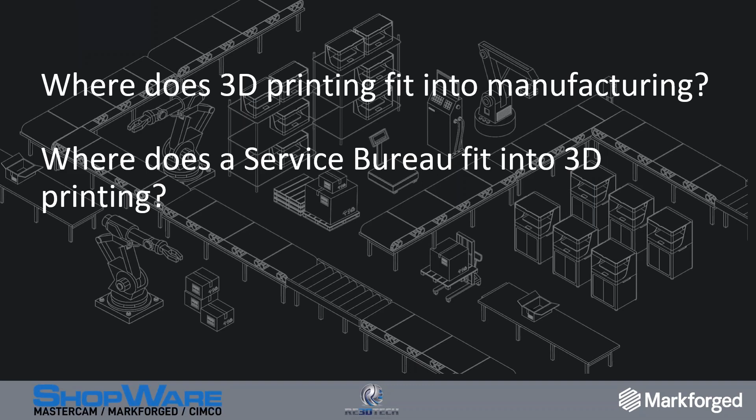Truth be told, there's an inflection point where it makes a lot of sense to use a service bureau for 3D printing needs, and that's the reason we're here today. We're going to take a step back and talk about current manufacturing processes, current state, and what are some typical processes today.

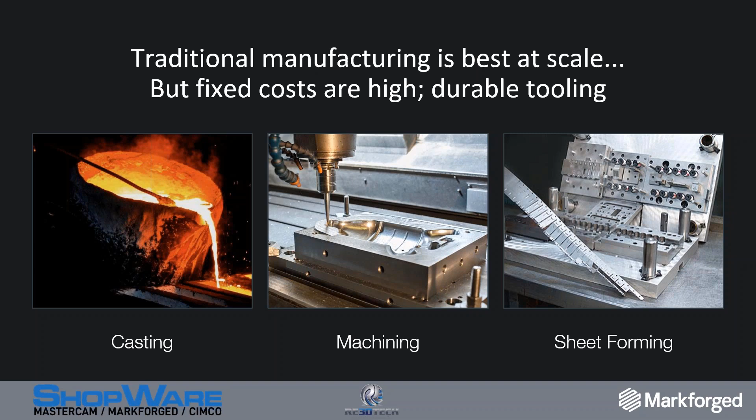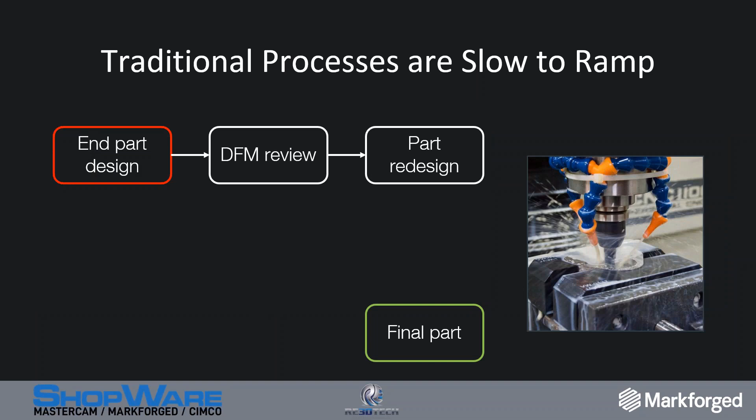The commonality between what we have on our screen right now is essentially that the fixed costs of durable tooling are expensive, and I'm sure we're all aware of that. In the process of designing and ending up at the final part, there's a multitude of steps. Sometimes these steps for making tooling interrupt a CNC, lathe, or machine shop time with non-billable parts. So you're making tooling where otherwise that CNC could be working on a current work order that you'll be shipping and invoicing, and that's what pays the bills.

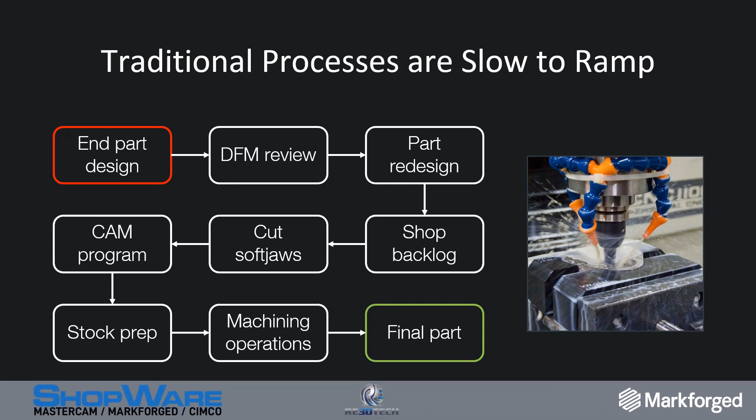Here's a list of 9 steps we're all familiar with in the process of coming up with the final part. That could be a fixture, it could be work holding, it could be soft jaws, it could be parts that go in a cope and a drag for sand casting, and or a CMM fixture in our case.

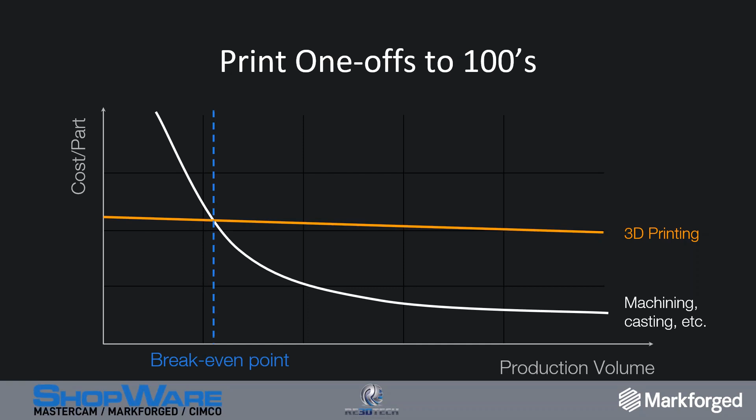The concept, the lay of the land if you will, of making that decision to 3D print or not, and whether or not to use a service bureau or your own 3D printer, is outlined here. For every use case, there's an inflection point of where it makes sense, economies of scale, to utilize this technology, 3D printing, given that in the application these parts will be within tolerance, they'll have the right surface finish, and other attributes like that.

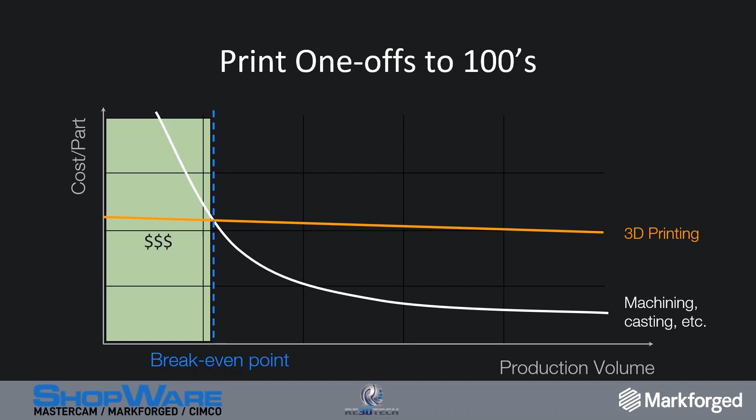When Pete or I start to talk to customers early on in the conversation about 3D printing, we like to understand what problem we're solving and what your current state might look like in the future if additive or 3D printing is adopted. In the background, there's a conversation we'll have concurrently with you about the commercial aspects of it, and I think this chart summarizes where you need to be or not need to be to have it make sense.

The takeaway from this slide and the slide after it is really to set the stage for where this is applicable or where it's not, because 3D printing isn't always the best fit. So there's a little bit of qualification of application involved.

But if you look back in time a few years, or even 5, 10, 15 years, you'll see a lot of design and prototype applications. If we're talking about FDM printing, for example, forcing a plastic matrix through a hot nozzle at a given layer width and layer height, ABS and PLA are common materials for designing prototypes. That's what it's been like.

With Markforged and the software they've developed with their materials and hardware, and because the Onyx material has 20% chopped carbon fiber in it, we're now able to talk about tooling, production, assembly, sometimes end-use parts. It really depends on the use case, the application, the ambient temperature if the part's outside, the heat, and if it's going through too much stress or impact and things like that. So where we're at today compared to a few years ago has widened the potential applications.

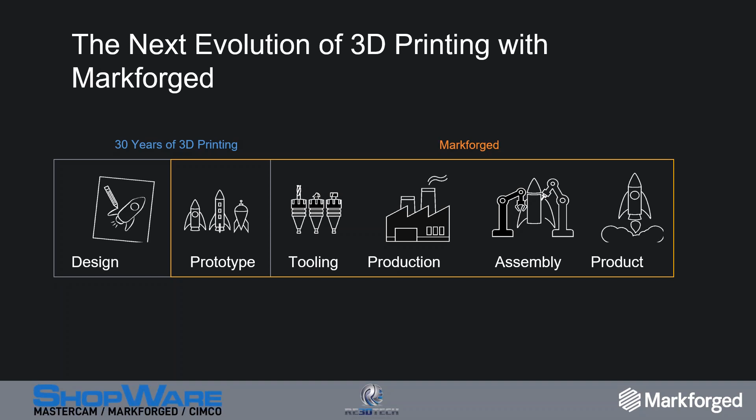Pretty excited to show you some of the stuff we have on our end. We've been fortunate to work with Max for a few years now and have had a really good relationship. One question you might ask is how does a service bureau, and actually a customer of the Markforged technology, fit into doing a webinar with someone that sells the printers? You'd think we'd just want to sell you parts, but the reality is a lot of our customers actually own Markforged technology and are well into their 3D printing journey.

So we embrace letting our customers bring in their own technology. In many cases, we act as their overflow point for volume printing, as well as a good turning point for specific applications we might be able to help them with.

To give you some perspective on what we have in-house, we really specialize in the three different avenues of 3D printing: plastics, and the more unique end, composites and metals. We have all the Markforged products in-house — 3 X7s, 5 Mark IIs, and the Metal X system with all the materials available, as well as the Sinter 2 unit for volume sintering.

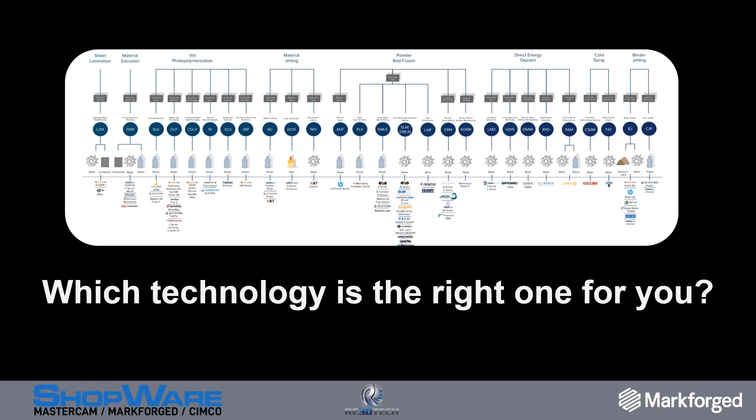And the Markforged technology is no different. What I will say about Markforged, though, is that it's incredibly unique, and there are pretty much three specific reasons why we decided to use Markforged over all the other FFF technologies out there.

Yes, they are a 3D printing company, but really they specialize in industry-leading materials, hardware, and software. I've tested out a lot of different nylon-based materials and filaments, and from my experience, the Onyx material is by far the best. It's a nylon 6 with chopped carbon fiber blended into it, great for high-temp and high-impact environments—a good fit for machine shops and industrial settings, which isn't really the case for most FFF-type printers using things like PLA and ABS.

So right off the bat, the base materials are a big advantage for us and what we try to provide to our customers. The hardware on these systems is top notch, and it allows us to do stuff you cannot do with other FFF-style printers—the biggest aspect being embedding and routing fiber internally in composite parts. There's not another single printer on the market that can do it as well as Markforged and obtain the strength qualities you typically need for an industrial setting.

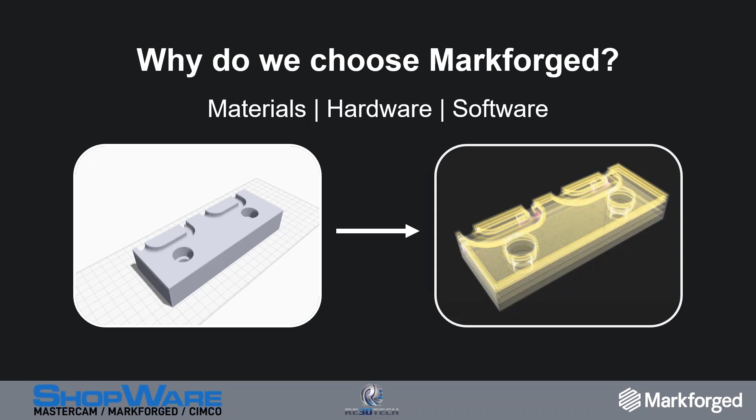So from a customer's perspective, they can reach out to us and have next-day tooling. But really, the best customer we have right now for Markforged technology is ourselves. I use it all the time for larger production opportunities, creating fixtures, custom tooling, and all sorts of projects around the shop that need to get done right away. It's a great fit, and something we're going to continue keeping in-house.

To touch a bit more on the unique aspects of the composite technology from Markforged, this highlights the part we were just looking at. What you'll notice is this is essentially an X-ray or internal view you can get from the Eiger software. Towards the top of the part, there's a higher density of yellow interior lines, representing the ability to embed true fiberglass, high-strength high-temp fiberglass, Kevlar, or carbon fiber into the part. In this case, it's high-strength, high-temp fiberglass.

It's mostly towards the top because that's where my component actually grips onto the piece I'm holding. So I don't need an excessive amount of fiber at the bottom of the part—I mostly put it there just to reinforce the bottom sections. Towards the top is where I'm actually getting equivalent strength to metal using that fiber. You can see that highlighted in the bottom ticker bar, which has groupings of the fiber in there, and that's completely customizable.

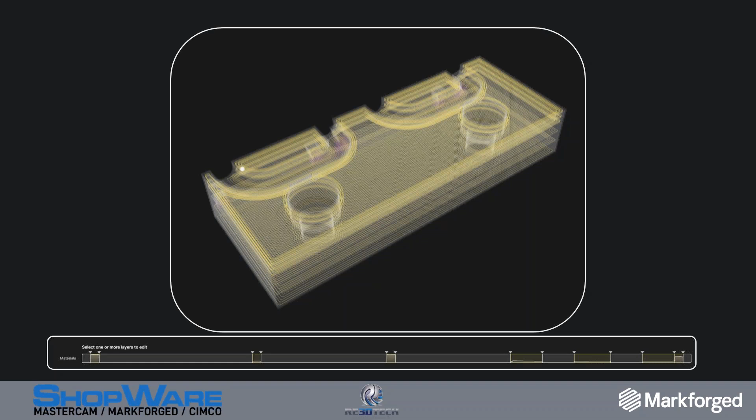I love talking about composites, but at the end of the day, everyone is really interested in metal. So I wanted to give a little application spotlight on a D2 tool steel application that we recently built out, and our customer just went into production with these components.

What you're looking at here are, best way to describe it, dent removers, customized dent removers for hail damage. This tool is used on the inside of a body panel. If you had a dented door, you'd drill a small hole in the side of the door and use this tool to go in there, and the body shops can finagle and bump out that dent from the inside. Not an application I ever knew about or had any idea existed.

This customer reached out to us because they were trying to manufacture and get these small components CNC cut. However, the specific surface they needed, with the spike features on the end, made it pretty difficult to CNC. When he first came to us, the part was not a really good fit for the technology, but with some minor redesigns, tweaks and changes, we were able to get this into a space where it made sense for everyone involved.

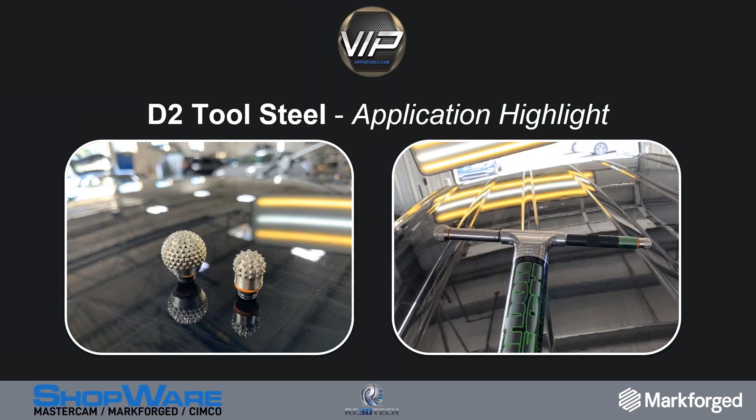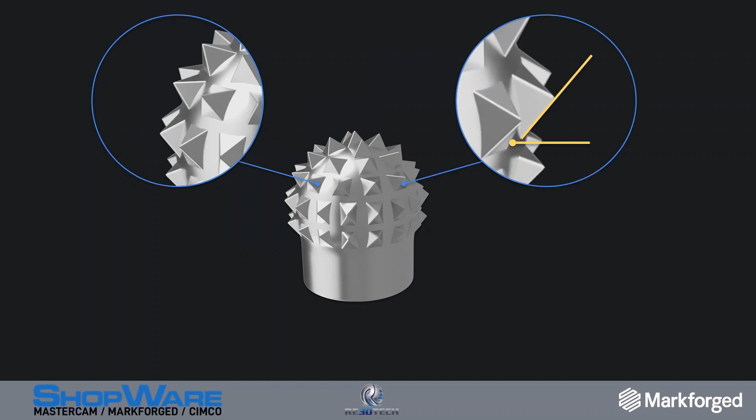Taking a closer look at this part, we call it internally just a little spike ball, best way to describe it. Taking a closer look at those spike features, it's a bit complex the closer you get. You might be asking yourself, why have those spikes designed the way that they are? If you notice, as they go around the sphere and towards the bottom, the bottom angle actually changes itself.

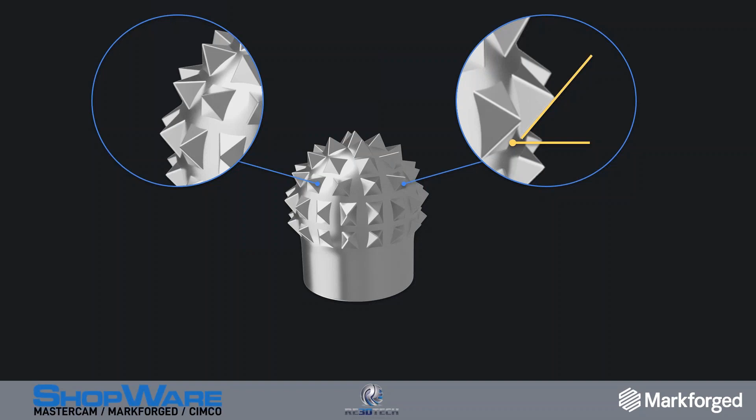The reason is because we needed a way to make sure there was no support that the printer needed to build underneath that. The best way to describe it is if you break a 45-degree angle from the base plate you're building this on, it's likely going to need support. So with a few minutes within our CAD system, we adjusted the bottom side angle of those spikes, and they no longer needed support. That cut down the overall amount of time needed to print this part, as well as the material needed. Just a minor change that had a big impact.

But out of all the things we changed, that was probably the smallest bit of it. Looking at a cross-sectional view, you can see that a bit more. And when you look at the cross-sectional view, you realize there's a bit more going on the inside that you can't see from the outside.

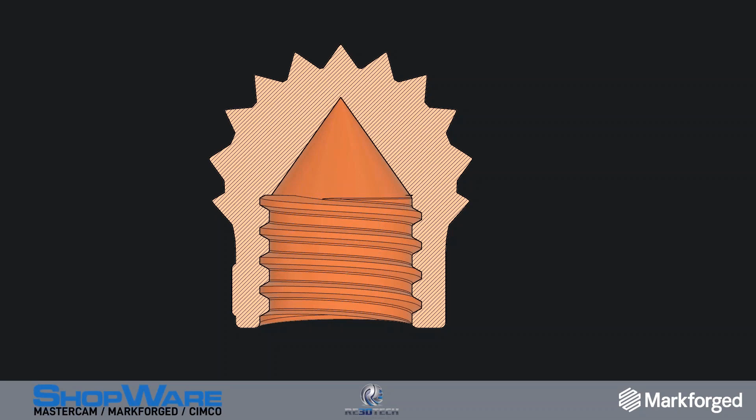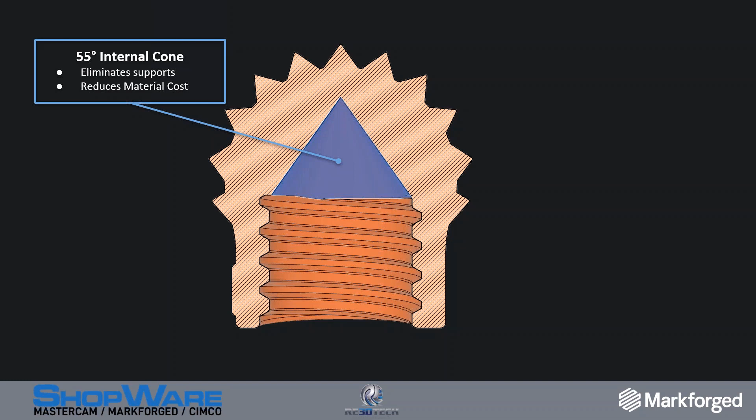To highlight some of those features, you'll probably notice this cone internally. This was not a feature that was in the part when the customer first came to us, but again, a few minutes in CAD, and we were able to get this built in. We used just a 55-degree angle internal cone, and the result was it completely eliminated the need for supports on the interior. That cut down the print time as well as the material cost, but also made it a heck of a lot easier to find this part as a good fit for 3D printing.

One of the other features that everyone loves to ask us about, or tell me that no, you can't do that—I get told that pretty regularly—is that we cannot print threads right out of the printer. However, we do it, and we do it at scale, and we do it in volume, and we do it well, as kind of a proud piece of something we've been able to figure out.

We've incorporated the threads directly into it, meaning we cut down the overall workflow needed for this part, as well as cutting down the post-processing needed. The result is we don't have to get a lot of different people or workflows involved in the end-to-end process for this part. We can just take them directly from the sintering oven, go through our visual inspection, and then put these parts into production.

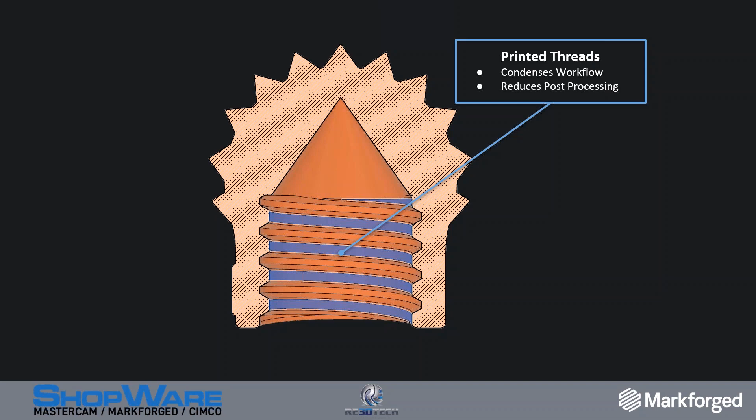One of the last features that typically gets overlooked with 3D printing is that customization of your part does not increase the overall manufacturing cost at all. In this instance, we were able to incorporate the company's name directly onto the part, something the customer really wanted but didn't think would be possible. It was just a few minutes in CAD, and we had a pretty unique customized feature that they really enjoyed and want to incorporate on all their parts going forward. It's something I'd highly recommend using in parts you design for 3D printing.

And this can be implemented on composites as well. I'm sure Max has some applications and parts he can show you how to use this in composites, by actually debossing the text and then using a wax crayon to fill it in. Works great for highlighting parts, putting product numbers on there, tooling IDs, whatever it might be. There's a lot of mass customization you can do with additive in general, and more specifically with the Markforged product line.

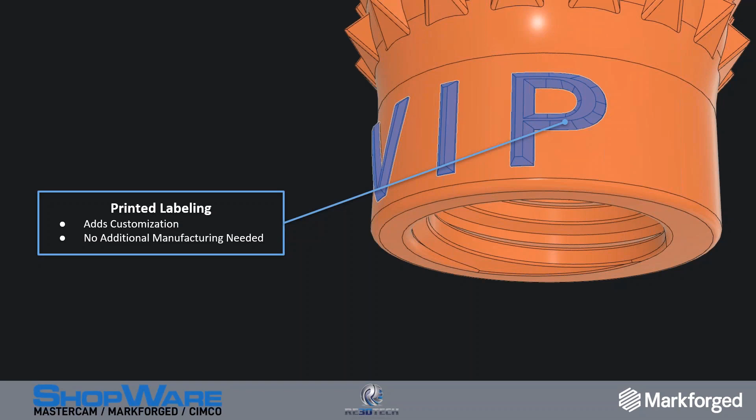So to really drive this message home, and give you some hard numbers to work with, you might ask yourself why you'd spend extra time to redesign or optimize your part. Well, in doing so, we took this customer from a hard no—is this even a good part for 3D printing or production—to a yes. We did that by changing some minor things on the part design, which cut the print time in half, allowed us to get a lot more parts on an individual sinter run, and resulted in roughly a 30% cost reduction. That last figure, the 30% cost reduction, is something we see pretty regularly when we get the opportunity to redesign a part for 3D printing.

So that's really all I had for you today. At this point, I'm going to pass it back off to Max here, and then maybe open it up to some questions.

Thanks, Pete. That's a really, really slick application. That's awesome. That's really cool.

If somebody on the webinar with us this morning wants to engage with Re3dTech, would you recommend they go to your website and fill out the form, upload the STL? How does that process work with you guys?